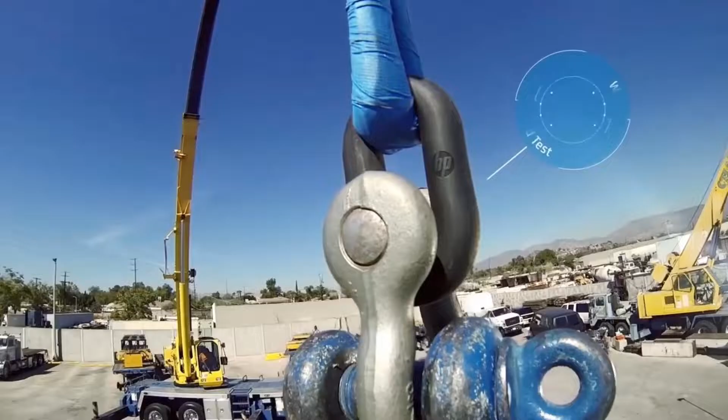To you, designers and engineers, captains of industry, and leaders of thought, anyone whose ambitions have ever exceeded what was possible - this is your moment, your rewrite history, the world is not flat moment. Every facet of how you design and manufacture is about to be reinvented, and it all starts here with the smallest of building blocks, the mighty HP voxel. You and it are about to change the world by advancing rapid prototyping, accelerating manufacturing, and taking precision and strength to unheard of heights. From today forward, the 3D printer is a factory for thought, where the things we make will make us smarter, better, more human. What a future we'll create with new materials and embedded intelligence. Together, we'll bring extraordinary to the everyday and reality to dreams light years away. Welcome to the age of digital production, on demand, a world without waste, without inventory, without warehouses. Meet the first HP Jet Fusion 3D printers, the digital furnaces of the next industrial revolution. Join us as we engineer the never-before voxel by voxel. HP MultiJet Fusion. Keep reinventing.

Thank you. So yeah, I always think it's very useful to start off with that, and then also explain a little bit about where HP are and our journey to 3D printing.

So we officially launched our first printer back in 2016, which was the one you saw in that video at the end. It's quite a large industrial machine, and at the point we released the printer, we'd been watching the market for a very long time, and we'd made the decision that the 3D printing world was brilliant - it's been around for 35 plus years now, but predominantly it's been mostly used for prototyping.

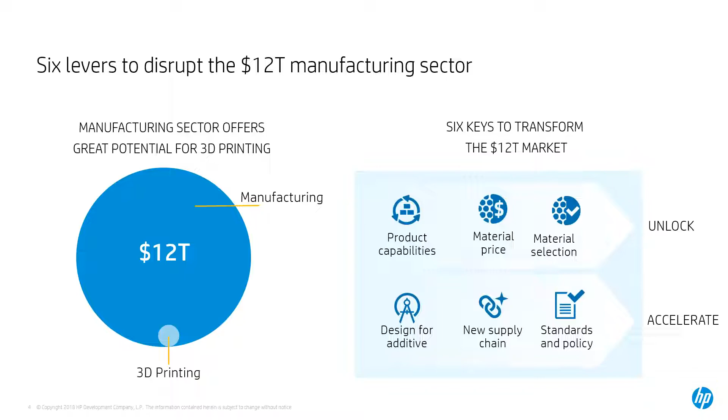So, how do you choose your parts, and why 3D printing? What's the big deal about it now? Oh wait, hang on, sorry—I'm supposed to go MultiJet Fusion Basics first. That was an error. So, MultiJet Fusion Basics.

In this section, you will understand how the technology itself works. Not a deep dive, just a basic overview in 10 minutes. You'll understand the subsystems of the machine and how they interact with each other.

I'll explain this in more detail, but we've got a couple of different machines, and the larger machines aren't just a single standalone printer—they've got other sections with them. Then we'll have a deep dive into the fusing science of the process and how it works, and why we're able to get the superior mechanical properties we talk about, especially in our Z orientation—we get very, very good strength.

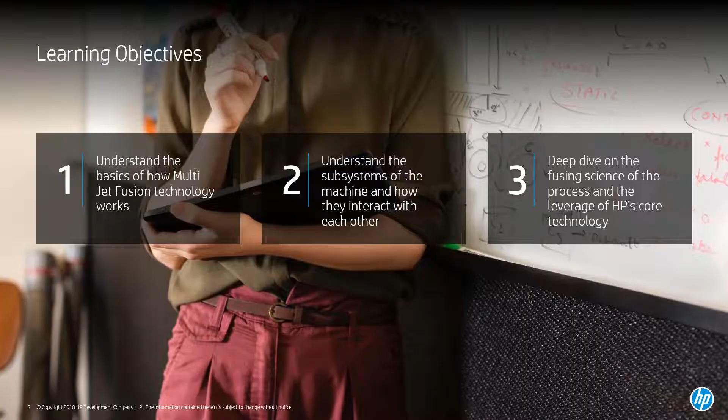The technology itself, the best way of describing it, is something in between material jetting, which uses print heads, and a binder jetting process, which uses print heads and powder. We are a technology in our own right—we are classified as powder bed fusion, that's what we do. And by fusion, we do mean fusion. We're not just sticking the materials together like you do in a binder jetting process—we're actually fusing it. It's actually melting to its melting point and sticking together. I'll go into that afterwards, but just to get rid of any misconceptions, we are a separate technology called powder bed fusion.

So how does it actually work? Well, the process itself is split into 7 stages, very similar probably to other 3D printing technologies you're used to, where you've got a 3D modeling stage, then you prepare your job within a 3D printing software, and you send it to the printer.

With our larger printer, there are 3 stages to the process where we actually do material loading within one of the machines to allow you to have traceability and mix your powders. We then have a separate machine that does the actual printing, and then you go back to that original machine for cooling and mixing the powder again.

Then you have an unpack process and a cleaning process, and then if you wish, a secondary post-processing. Now, with the machine at Sunderland University, they've got the smaller, full color printer that we have, and that is just one single machine that does all of these 3 processes that you can see above.

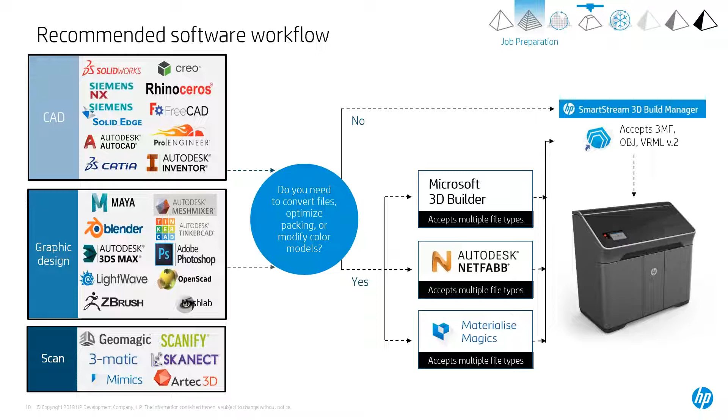So the next slide is a video of the technology and how it works. Like I mentioned, it's a video that's not about the smaller printer, it's about the larger, more manufacturing related printer, but it's just to show you the process and how it works, and why we think it's really able to help you manufacture if you get there at some point.

Introducing the HP Jet Fusion 5200 series, HP's most advanced plastics 3D printing solution. Made up of a printer, build unit, processing station, and HP's first natural cooling unit. Now you can unleash new growth and scale your production with an optimized workflow designed for production environments. The build unit is inserted into the printer to initiate printing.

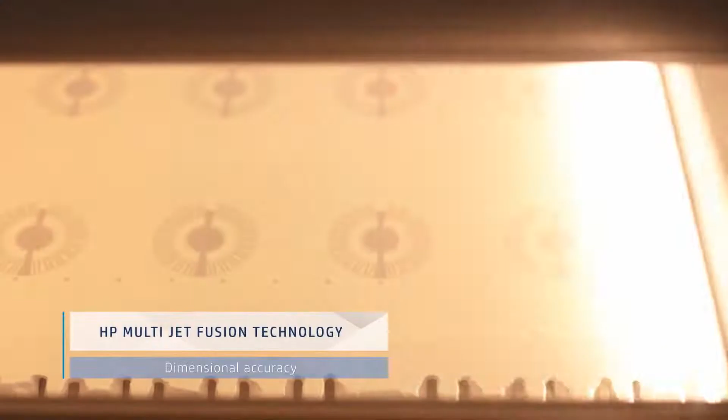HP MultiJet fusion technology delivers dimensional accuracy and repeatability, allowing you to produce functional parts with best-in-class isotropy, while uniquely predictable and consistent print times for any type of part enable you to optimize production.

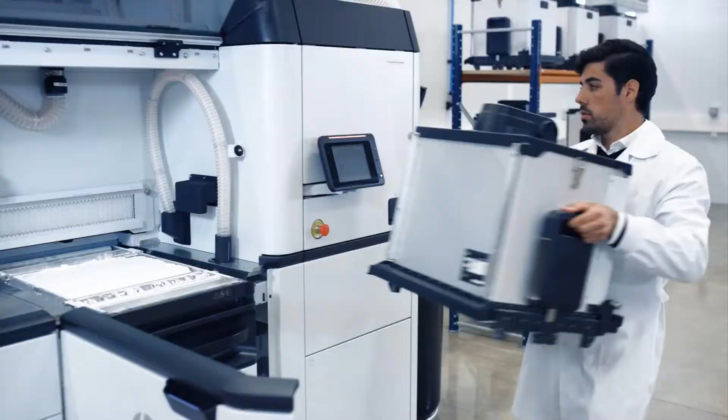When a build is complete, the build unit is inserted into the processing station and prepared for cooling. The HP Jet Fusion 5200 series natural cooling unit is designed to remove and cool each build naturally, thereby enabling continuous production. The natural cooling unit is placed on top of the build unit in the processing station. The sliding lid is removed and the material collector attached to aid extraction.

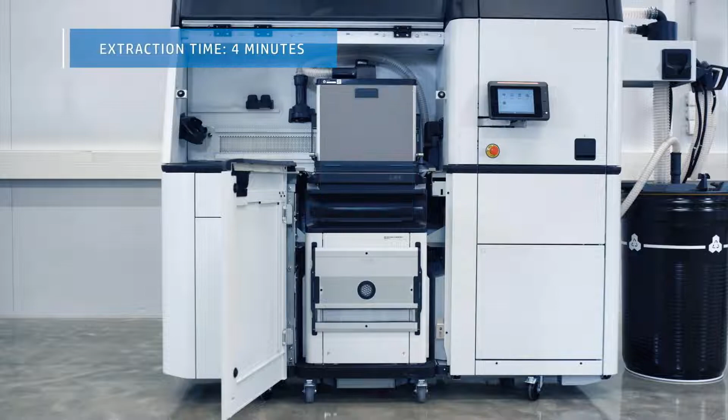The processing station's RFID sensors register the natural cooling unit and the identity of the build, prompting extraction to begin. During extraction, the internal platform of the build unit is raised, moving the build into the natural cooling unit. When the transfer is complete, the slicing blade is reinserted and the material collector detached.

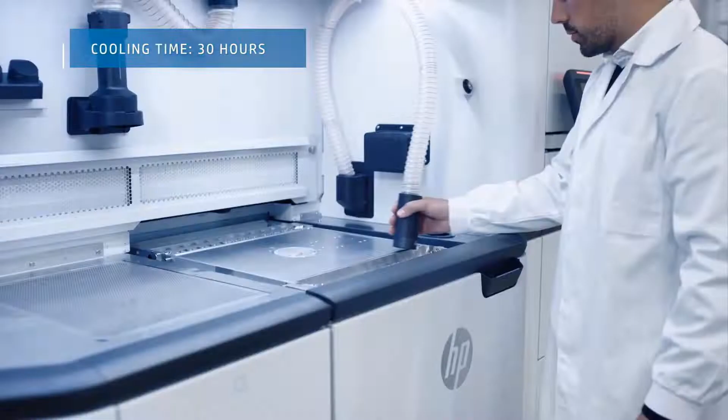The natural cooling unit is then removed from the processing station using the HP recommended Hoffman forklift 5200. It is then stored and left to cool for 30 hours. Meanwhile, the empty build unit can be prepared for the next job, which starts with material loading.

Fresh and reused material is automatically mixed according to the predefined mix ratio and loaded into the build unit in a clean, enclosed process. The build unit is then returned to the printer and production can continue.

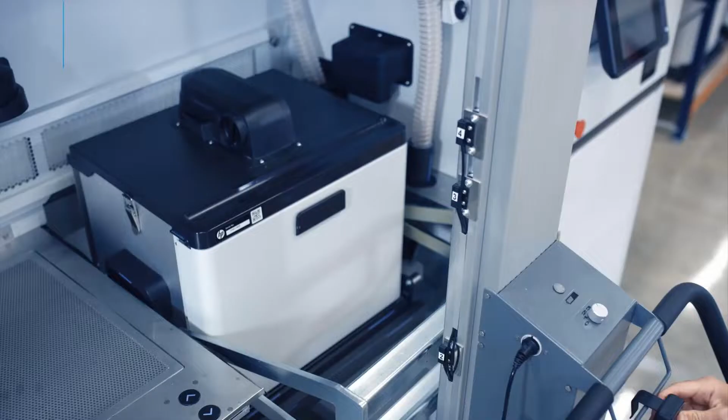When a stored build has cooled completely, it is ready to be unpacked. The natural cooling unit is inserted into the processing station in the unpacking position. The lid is removed and the natural cooling unit cover put in place to ensure the material remains within the processing station for a safe unpacking process.

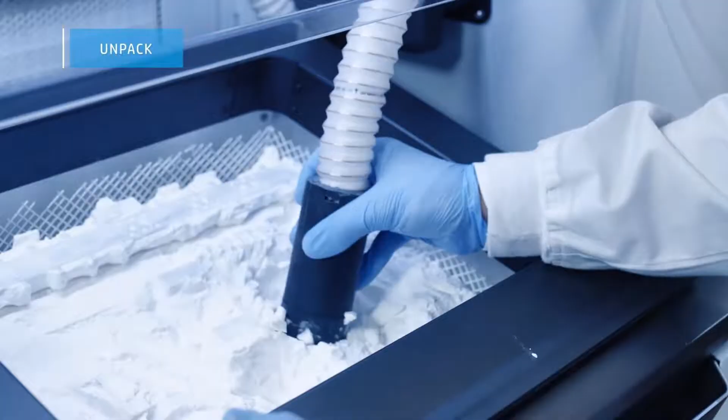During unpacking, the unfused material is extracted for reuse and the parts removed for post-processing. With unpacking complete, the natural cooling unit can be removed from the processing station to await the next build.

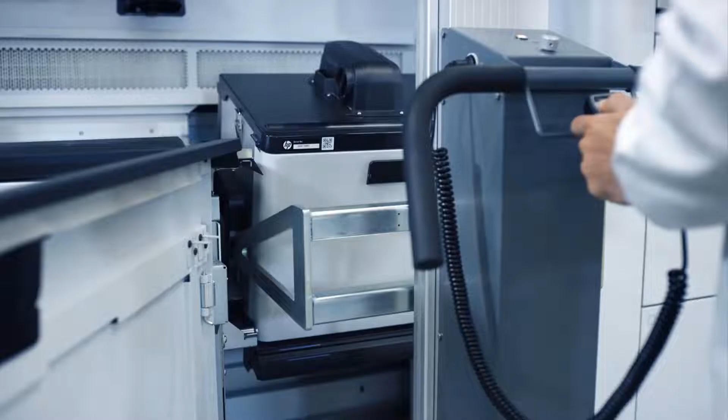The HP Jet Fusion 5200.

So that was a little bit about the technology itself, so you can actually see what it's like and how it works. I'm not going to delve into it too much.

The one thing I will say is, as you saw within the video, there were at least 4 different parts to one printer. With the technology at Sunderland University, everything happens within the one printer - your material mixing, your printing, the cooling of your parts, the recovery of your parts. Even in that machine, the recovery of the parts is actually automatic. The powder is automatically taken out and you're left with a part covered in a small layer of powder that you can then either dust off or take to a bead blast cabinet. So the concept is exactly the same, it's just all done in one machine rather than multiple machines.

The reason we've done it in multiple machines for the bigger one is purely for productivity. If you're really using the technology for manufacturing, you don't want to have to wait for your parts to cool down within the machine before you can recover them, because the cooling time can be quite long, and you want your printer to be able to print 24/7. So we've created it in this way so that you can easily switch out a build and put a new one in, so you can continuously print.

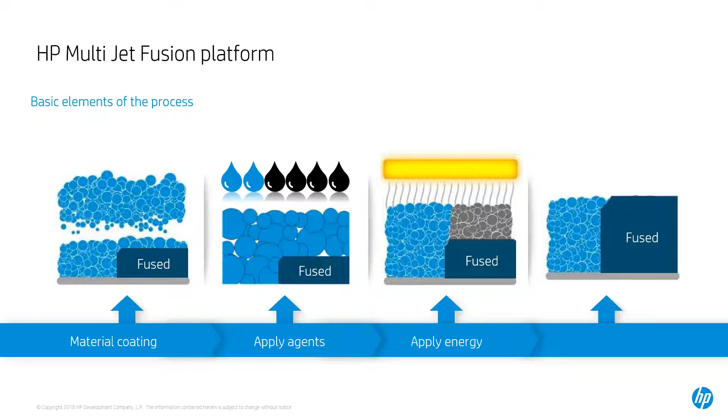In terms of the mechanical properties and what's actually happening, the reason we say we've got isotropic parts is because of the fusion happening in our Z axis. Just like any additive manufacturing process, we are adding layers of powder, but the difference is that as we're adding those layers, we're heating the powder to its melting point. What ends up happening is that between the layers we get molecular diffusion and chain entanglement, which allows the layers to actually fuse between themselves, giving you a much stronger part. Rather than one layer sitting on top of another, those layers are now actually entangled within each other.

The crystalline chains are actually crossing over between those layer boundaries, producing a stronger part, which is near enough equivalent to an injection molded part in terms of strength. So that's kind of the way that it actually works.

And then this is the Jet Fusion 500 series, the 300/500 series. I believe AMAP's got the 500 series, so it's the slightly bigger one, and it allows you to print in...

Do you guys have full color or is it just white? Sorry, Carl, I don't know if you're there. Yeah, I'm here, sorry, trying to turn the microphone back on. Ours is just the white one. Just the white, yeah, so you're able to print in the white color.

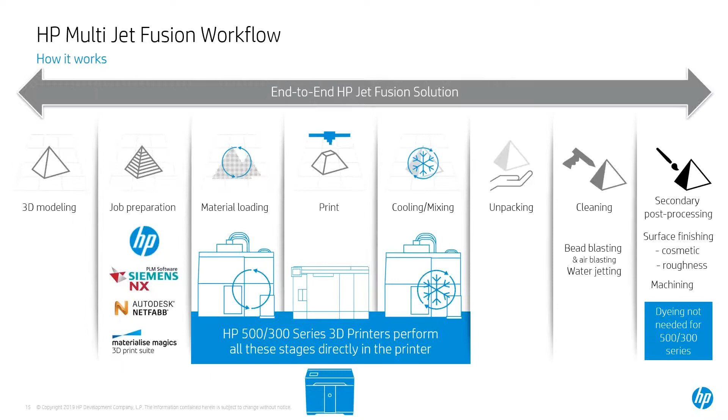So now we will go on to how to choose your part and why 3D. Apologies about the mistake earlier with my slide.

So in this section, hopefully we'll understand the main reasons to adopt 3D printing, and particularly MultiJet Fusion. What are the key value propositions for it? Learn how to identify the best applications for MultiJet Fusion within your business, because not every application is the correct one. Hopefully we can show you where to identify those opportunities and how to identify them, and then understand the why-3D-printing behind some real applications. So I'll divulge into those key value propositions and show you some examples from each of them.

So why are we here today? What we're finding is that market and consumer trends are showing that companies are looking for faster development cycles. They want quicker time to market, and a lot of companies are now moving towards mass customization. We've got companies like Coca-Cola who are putting people's names on bottles, Nutella who are putting people's names on jars. What's the reason for it? It's because people like to see things that are slightly bespoke or slightly customized. So that's kind of the reason why a lot of companies are now moving towards mass customization.

You've got high level management in companies that are now starting to look for double-digit operational improvements. Most options that they look at might only have a small amount of savings, let's say 5% savings or something, and these don't look as attractive as what you're seeing with 3D now. In a lot of cases, you can see significant weight reduction if you're going from CNC parts to plastic parts, up to 80% in cases or more. You can have savings in costs as well, and again, I'll show you some examples of these. So it's starting to look like a real positive contender when it comes to looking for large operational changes.

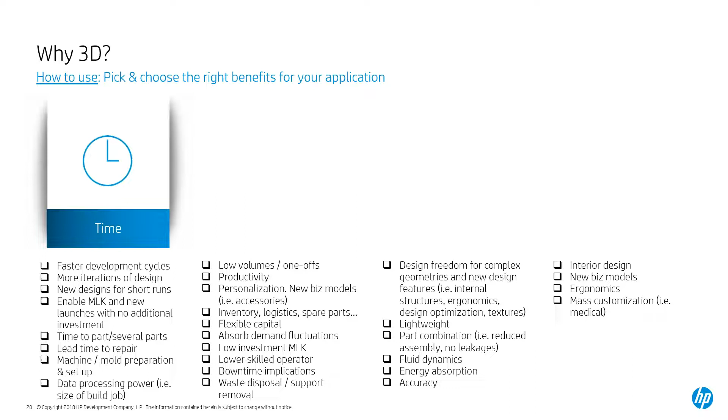For example, if it was a time advantage and you knew that a particular part was going to have a time advantage, but also have an economic advantage, a performance increase, and personalization, that would be a brilliant case for you to go to 3D printing. If moving to 3D printing is only going to improve it in one way, then it might not have such a strong business case. But like I said, if it's a time advantage and it's going to let you go to market faster, then yes, it might be worth you doing it.

Or if it's personalization, for example, which we're finding in the medical industry at the moment, that can have a huge advantage just on its own, whether it costs more to produce or not. Majority of the time it doesn't, but whether it costs more or not, having something that fits better, especially in the prosthetics and orthotics industry, is a huge advantage. So this slide, which I think you've got in the handouts as well, will just help you identify which applications to focus on.

So what I wanted to do now was show you an example from each of these different value props, so you can see where people have used 3D printing and the reason for why they've used it. So the very first one is time, and the example that I'm using here is actually an HP example, an internal example. It's from when we were in the process of producing the 300 500 series printer - this is the one that's at the university. When we were producing this printer, we had announced it, I think, a good year before it was actually available in the market. And because we'd created the first prototype of it, we knew where we were going with it.

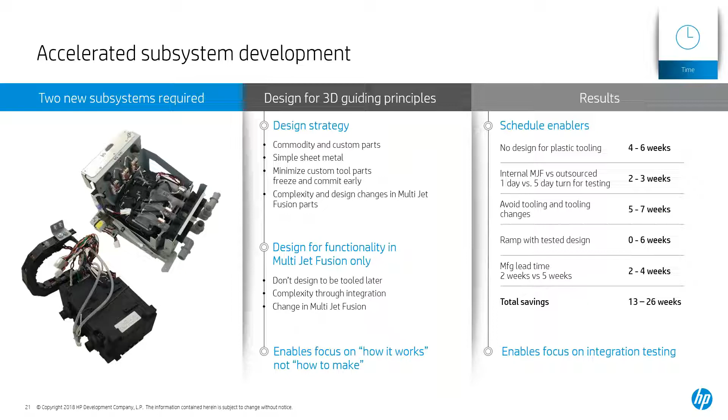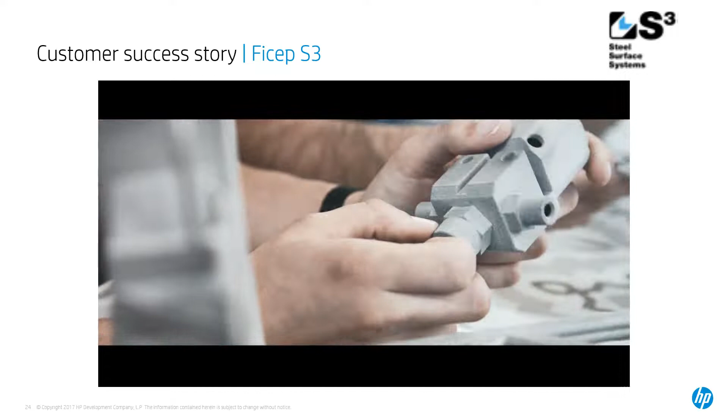Ficep S3 belongs to Ficep Group, a multinational company that constructs machinery for structural steel. When you see a building or a bridge, the metal structure was probably made with one of our machines in over 30 countries worldwide. We never considered using 3D printing for production until we saw HP's MultiJet Fusion in action. Now we're making parts we weren't able to make before, in-house, and we have them the next day. The machine we're building is a paint machine for industrial steel. Once we saw how the parts come out, we noticed how strong and light they were, so we redesigned the entire machine based on this technology. 40% of the machine is done in 3D now.

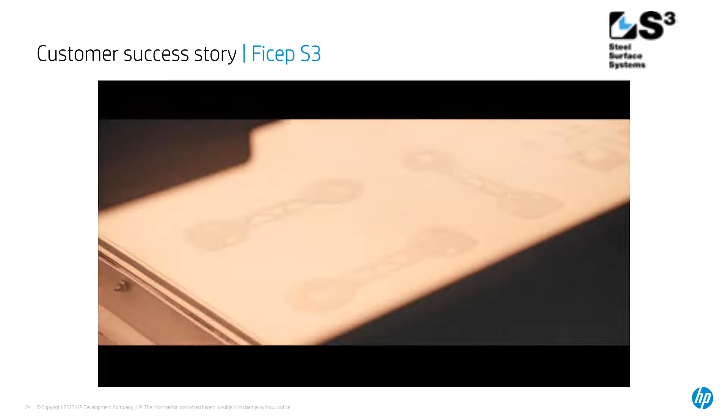The robotic arm, which holds the paint nozzles, is about 1.5 meters high in a traditional machine. We were able to reduce it in 3D to 300 millimeters. You can't design it any better than what it is now. Making the part so small, we were able to save a lot of space, where we could add other systems without increasing the floor space the machine takes up. Just making one part in 3D can help you rethink the entire machine. What HP has done is made us a machine that can not only do the prototypes for us but also the final production. This is where it excels, because now we don't have to wait 12 hours to make one part — in 12 hours, we can make 100 parts.

Going back to that, one of the things he mentioned was performance improvements — making it lighter, smaller, etc. Because they made it lighter, they were also able to add webcams onto the paint arm so they could see how the paint was being sprayed. They found they had a lot of wastage of paint because of the angles and things. By applying webcams, they were able to improve the way the arm sprayed paint onto the beams, which saved them money and gave additional savings in other places.

The final example for this section is personalization. The industry that's really benefited from this the most, from what we can see, is the orthotics and prosthetics industry, the medical industry — anything to do with people and personalization.

The example I've got here is for a company called Invent Medical, and their story is quite incredible. They were a small business in Czech, and they saw one of our early announcements of our printer, back in 2016. They thought this was a great technology they could really use for personalized prosthetics. So they tried to reach out to us, but it was very difficult to get hold of HP, and they were unable to reach us. They created a website dedicated directly to trying to get our attention, and started sending us blasts on Twitter and social media. Eventually they managed to get our attention — this was prior to us properly launching the printer, so we ended up working with them in the development and early stages of the printer, sampling and things like that.

So just looking at that graph again, in the X axis you've got the time along the product's life cycle, so obviously from its development all the way to its aftermarket service stage, and then in the Y axis you've got the production volume. And the graph for 3D tends to look like the total inverse.

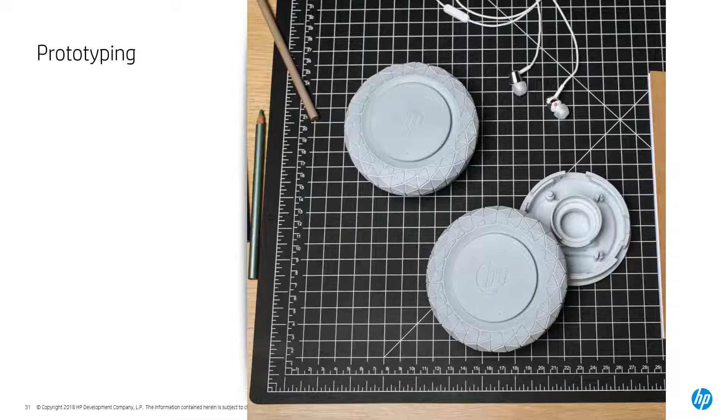So what we found within HP was that the very first area that you can look to adopt the technology, if you're not already doing so, is prototyping. Now for us, we had already adopted 3D printing within prototyping, and prior to the release of our own technologies, we were using competitor technologies to produce 3D printed prototypes.

So for us, this was not an area where we're going to show our adoption journey - we were already doing this. In fact, some of the earlier HP printers, the very first few, did have parts that were made by other manufacturers within them, because we didn't have our own technology at that point to produce parts with.

And now we use our technology because, well, not for everything, but the things that we think it's useful for, we'll use it for that. And it's not one size fits all. You can't use 3D printing everywhere.

There's specific areas where you can use it, and specific areas where you can use HP's technology. So prototyping is one area we were already using it, but a place that we weren't really using it was for molding. So still during the prototyping stages, yes, you can produce your actual prototypes with 3D printing, but you can also use 3D printing technology to produce molds and aids that can help you with the initial production run. So we weren't using it for things like reaction injection molding or blow molding, and this was a place where we realized we can start to implement the technology.

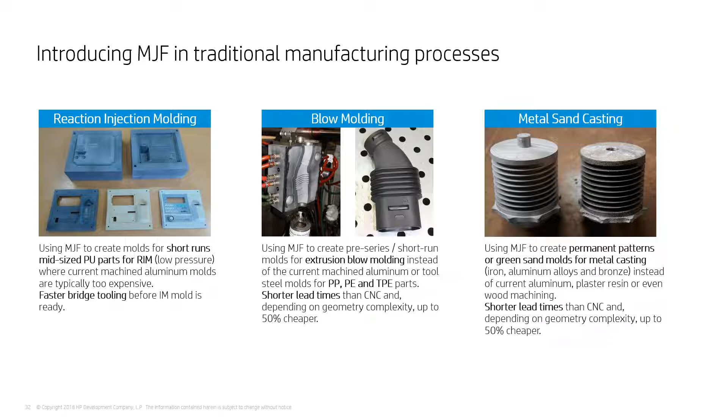When it comes to short runs, 3D printing is great to produce the actual mold itself. So this is just some of the areas, and metal sand casting as well for the green part, silicon molds, thermoforming molds, and then also machining MJF parts. So these are other areas where if you can't produce the actual component or prototype with 3D printing technology, you can still use it elsewhere, or you can use it in what we like to call hybrid production.

Often you'll find that 3D printing, in terms of dimensional accuracy, isn't as accurate as, for example, machining. So what you can do is hybrid production, where you produce your component in 3D printed plastic, and then machine away the specific areas where you need specific dimensions. So you're using the advantages of both technologies. There are other areas we realized we could implement the technology within prototyping.

And then if you go back to that product lifecycle graph, we also started to look at the other end of the curve. So these are kind of the two easiest places to adopt 3D printing: prototyping, and then your spare parts and digital inventory.

We find that in most industries, when it comes to spare parts and procurement, that tends to be quite a big pain point, even with us as well. So one of the examples within HP itself was the example of spare parts.

We found a great opportunity within our large format printing business. These large presses for us can have a lifespan of well over 10 years, often well past the point at which production of those models has ceased. So we still need to be able to service them somehow, so people can continue to use them.

At a certain point within our product life cycle, we do a final buy where we place a final order of the quantity of parts that we think will fill the need for that particular machine for the rest of its life in the install base, however many machines there are. So we place a final order, and I'm pretty sure many of you do this as well.

These are then warehoused and used when needed, and often in order to get a lower price, because the parts are injection molded, you order far more than you need and end up with 50% that usually end up not even being used. So for us, we thought this is a great opportunity for 3D printing and maintaining a digital inventory of spare parts.

So let's just print them when needed rather than having a warehouse full of them. And also those warehousing costs as well, having space, inventory, a warehouse. If you start to look at removing or reducing that, you can find significant savings.

So what we thought was, this is going to be really easy for us, we'll just replace it. But it wasn't possible, because we had our own internal processes that we had to try and get through. What we found was that we weren't allowed to just start printing the parts at the end of the product's life. That process had to be validated at the start of that printer's development. So they wouldn't let us do it.

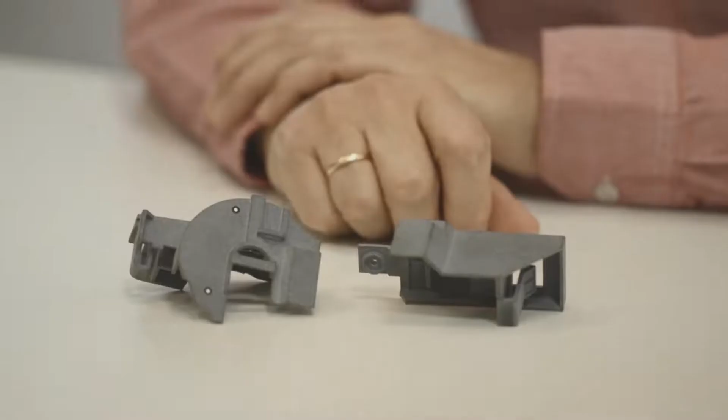There has been a lot of talk into using 3D printing for spare parts. We have several thousand parts that are very low volume, and manufacturing them is always a problem. Finding technologies that allow us to do smaller batches of parts more adjusted to our real needs was an improvement in our supply chain. I had these parts and other parts we were planning on my desk.

Many R&D engineers were going through, all of them were stopping by, and they were excited — oh, this could be done. These are small covers from an existing printer that has been manufactured for more than 10 years, which means it's difficult to get them from the original technology, from injection molding. What we learned is that it could be easily used for many other parts.

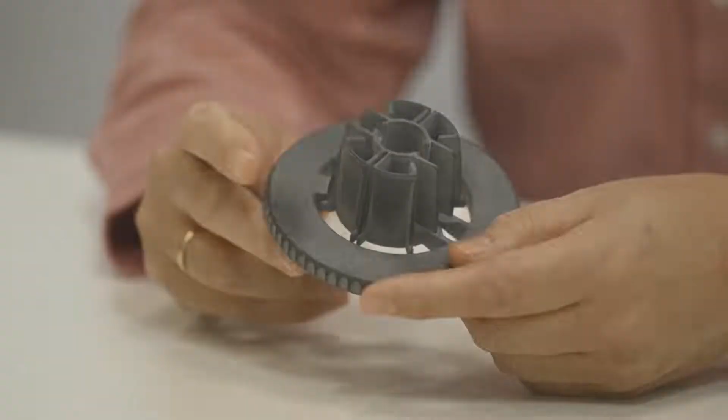We are now going to bigger challenges for the next generation. So you can see some of the parts in that video.

One of the examples we've got — like I mentioned, there was a site, we don't manufacture our own parts, we use third parties. One of our sites, I think in Malaysia, actually bought a machine because they found so much advantage from 3D printing. I think in their first year they had about 80k worth of savings just from replacing injection molded or machined jigs and fixtures with 3D printed ones.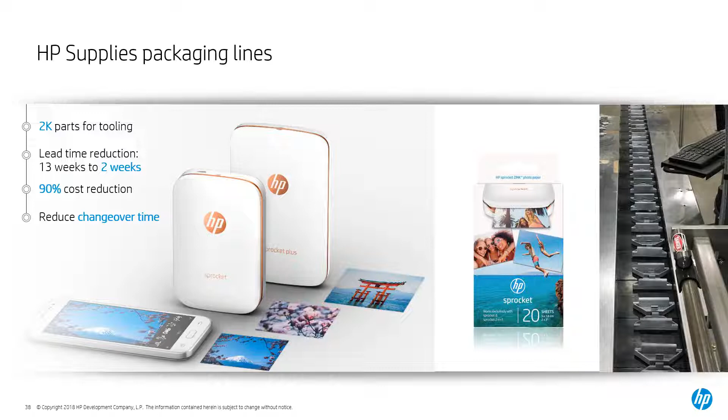The other example is that drill extraction shoe I mentioned earlier, which went from being so many parts to a single part. It's got ease of cleaning and significant weight reduction, because these drill extraction shoes aren't in the easiest locations to access, so for engineers to get to those areas and clean them out or change them, having a heavy one before was not great.

So it's had great advantages for us, and this is actually a totally different location to the one on the previous slide. So we're adopting it across lots of different manufacturing sites at HP.

We then found a great opportunity for 3D printing as a tool for bridge production, getting to market quicker and learning and testing on demand. You can use the mold examples I mentioned earlier when introducing new products. If you don't know how the market's going to receive or adopt them, and you want to produce a small number, you can use the mold examples, or produce certain parts in 3D printing, especially until you know how high the demand is going to be.

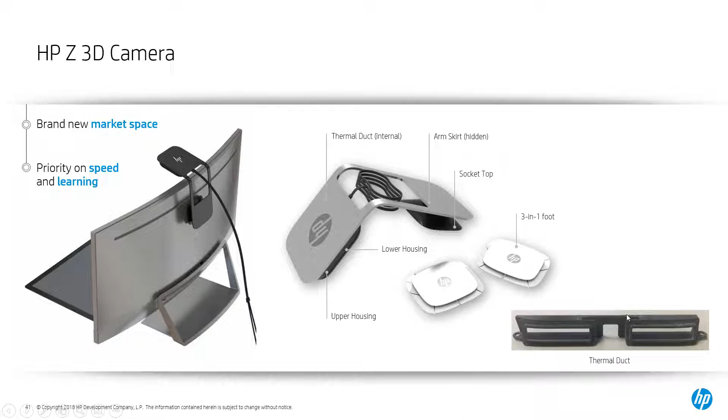Since the product category was new, the priority was on learning and speed. It also meant we had very little way to estimate demand, so production volumes were uncertain. The part in the bottom right, which I'm about to show you, is still in production today being 3D printed - this thermal duct over here is still in production with 3D printing today.

This 3-in-1 foot was initially done with 3D printing, but because there were 3 parts to it, eventually it made more sense to move this one over to injection molding. But the design had to change because the current 3D printed design couldn't be injection molded. So we had a few design improvements, but once we knew how the market was receiving it, we were able to figure out economically what made more sense.

Because there was only a single one of this duct for each 3D camera or scanner, it made sense to just carry on being 3D printed. For us, it gave an idea of how the market was going to receive it, and reduced our lead time. Instead of having to get a tool created to injection mold this, and waiting a couple of months for that tool, we could just 3D print them, have them within a couple of days, and send them out to the market. So for us, this was great.

This cost advantage with the thermal duct - if we injection molded it, it would have cost about 50k more than it did as a 3D printed final part. So it had a good cost saving for us as well.

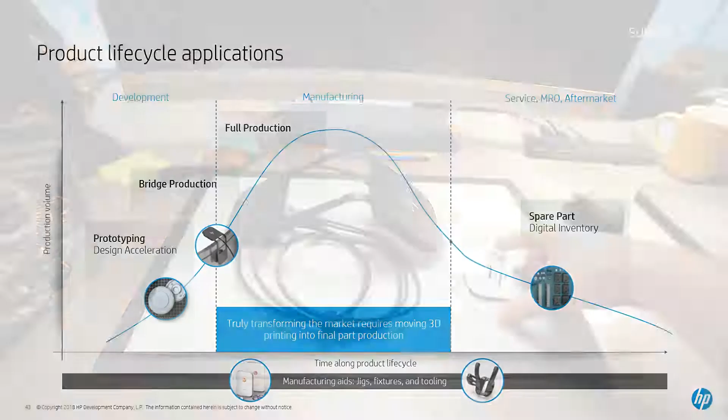Those areas were quite easy areas to adopt 3D printing, and the majority of companies, if not already, probably are doing this. It's the easy place for you to start looking at 3D printing. But for us, that's a very small amount of where the full production happens, and the volume of parts produced in those stages is very little. So in terms of what we wanted to do to hit that manufacturing industry, we're not actually hitting that. We needed to find places where we could introduce 3D printing into full production.

We found an example, though it was a bit of a cheat example because it was a manufactured part, but only a quantity of one, which was this printer we needed for the International Space Station. We were approached by NASA to produce a printer, because printers work with gravity, your paper drops into your tray. So what they needed was a printer able to catch that paper, so it doesn't just float away. They approached us and said, look, we need a printer that's going to work in space. This is just a standard 2D desktop printer, and what we did was develop this feeder and catcher — you'll see it in the next slide.

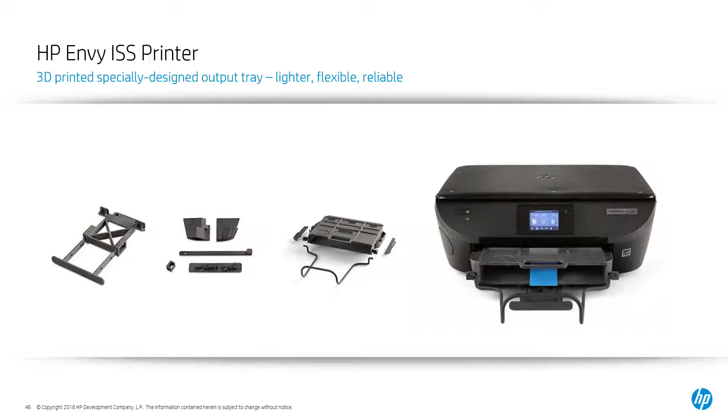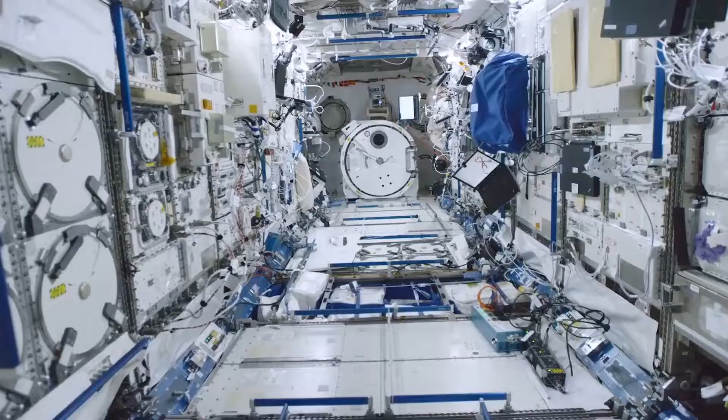Our mission in HP is to engineer experiences that amaze. And there is not a better example of that than the work we have done with NASA. In space, there is no gravity, and our printers work today because of gravity. The only way we were able to address this problem on time was because we had access to HP 3D printing technology. We were able to design more complex parts, but that are also much simpler and more flexible. At some point, we also had to test the whole printer in a zero gravity environment. This shows both how capable our teams are, but really that anything is possible when we work all together.

So that's a nice little case study, but obviously not a truly proper production part. I'd say our first real case study of where we actually used 3D printing in manufacturing is this next part, or this next printer.

This is our latex printing business, and there are several machined components within the machine, one of them is aluminium. Our engineers actually brought it to us and said, do you think you can do anything with this in 3D printing? It was quite a large, heavy aluminium machined block — 355 grams in total. We produced loads of these machines, and it wasn't very complex, as you can see.

The first thing we did was change it into a 3D print block design, as you can see here — we just cut off the big chunk of pointless material that was over here. In machining, the more moves a machine makes and the more complex a part is, the more expensive it becomes, so they'd probably left that bit there because of the cost it would have added. But in terms of weight savings, just changing it to plastic and cutting off that chunk reduced it to 80 grams, significantly reducing the weight.

What we then did was, because with 3D printing you can have a bit of complexity to your design, you don't have to have things that are block and squares and solid. We put a lattice through it. We were walking around, and this reduced the weight to 55 grams. We were walking around with this design for a good year, showing everybody how amazing it was, going from this block to this block over here.

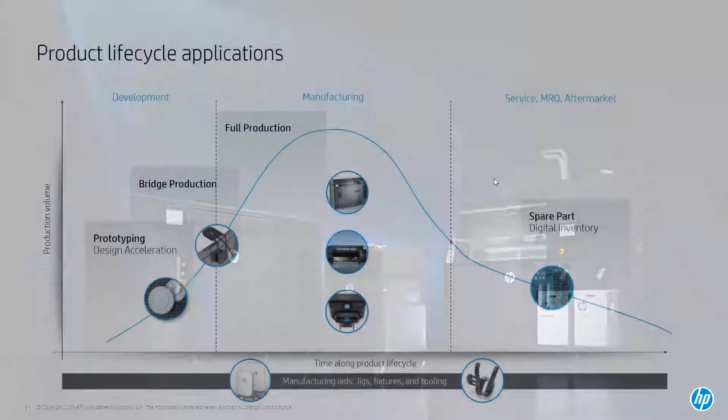So having to look to replace injection molded parts with 3D printed parts made sense. So for the larger printer, this one over here, half of the plastic parts within the printer were printed by the technology itself. Many parts within this machine - and again, we're not producing them ourselves, it is our suppliers that are producing them. I think the break-even points for these parts, just by redesign or thinking about combining different parts into one, climbed from sort of 5,000 parts up to 40,000 parts, just as we started understanding how to design for additive. So that was like another great case study for us.

But the next one is where we really made a real difference. And the only way we were actually able to make this real difference was by getting our engineers to go on training courses, understand how to design for additive manufacturing, how to understand where to apply lattices, how to produce lattices, how to use topology optimization, how to use generative design. We had to show them the real capabilities of 3D printing and what softwares can do now, to get them to properly adopt the technology for the production of the 500, 300 series printers.

So in these printers, initially it's a small printer, quantities in the tens of thousands. When we first started designing it, our designers were quite skeptical about 3D printing, being very used to it as a prototyping or toy technology. They weren't sure if 3D printing could meet the needs of the parts or be robust enough. So they came back to us with 29 parts they thought could be 3D printed. That wasn't a good enough story for us, and we thought we could definitely do better.

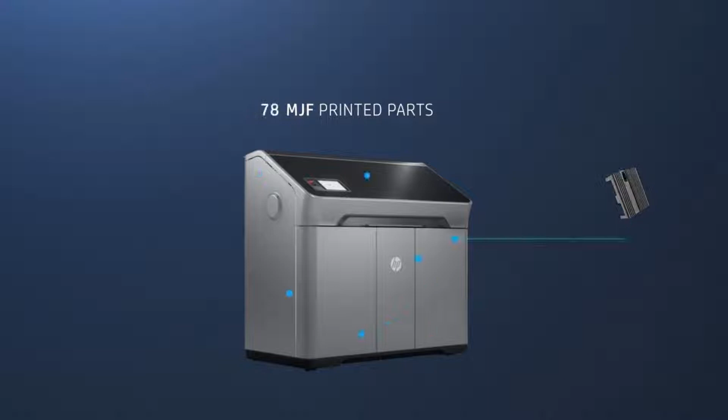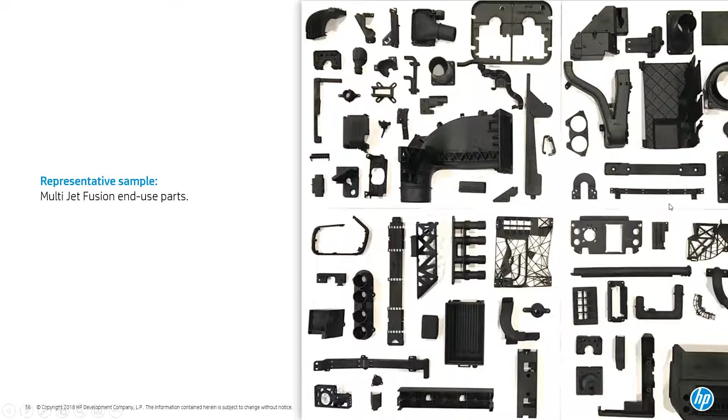Looking at some of those parts—we'll go more into this in the final stage of my presentation—these are the sorts of designs. As you can see, a lot of them, especially these ones, are not your standard designs you'd normally see, especially if designing for injection molding or machining. Some are quite complex looking, many have more than one function, and many are multiple parts that would usually be injection molded in 3, 4, or 5 pieces but are now 3D printed as a single part. So this is just some of the 140 parts—we'll go into the funnier looking ones afterwards.

One example is this 3D printed duct. Our parts are fluid tight and airtight, and this duct was never designed to be injection molded. If it had been, it would have involved about 6 different parts as well as a threaded insert, and would have been quite costly to produce. It was always designed for 3D printing from the get-go. As you can see on the right-hand side, it's one single duct with another attachment at the bottom. That key area is one single duct with a fan inside of it.

For us to produce it with 3D printing, it had a capital expense avoidance—we avoided a tooling cost of 190K. When it came to production costs in total, that amounts to a total cost saving of 30% compared to if it had been injection molded. So for us this was quite a good example, and there were also time savings for the designer as well.

Now, we have a partnership with Siemens, and Siemens were looking for components that they could really show their value on. We were in a meeting with them, and while they were there, they saw this duct and said, you know what, we think we can design this better than you guys have done using our software—we're going to show you what our software can truly do.

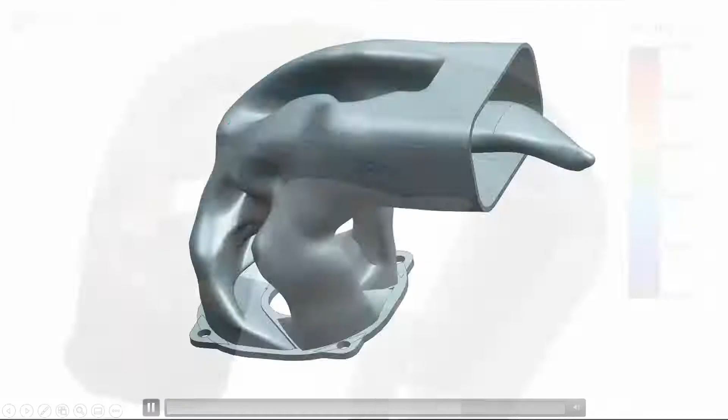As it does that, you can see—there's a lot of turbulence at the start over here. The flow seems okay towards the end, but there's a lot of turbulence on the corners and edges. And so Siemens said, we feel we can improve this part for you. And they did.

They changed the design from being this single 3D printed part to this single 3D printed part, which, as you can see, looks quite organic and different to what you're used to seeing. Over here, you can't see it properly, but there is basically a tongue in the design. Again, a tongue is very organic, but in terms of its design, it helps improve the flow of the heat that's extracted from the print head.

I'm not going to go into it too much because the video itself explains it, and it explains the full Siemens process and what the software is capable of doing, all the way to producing a digital twin and your smart factory environment. But they go through the story a lot better.

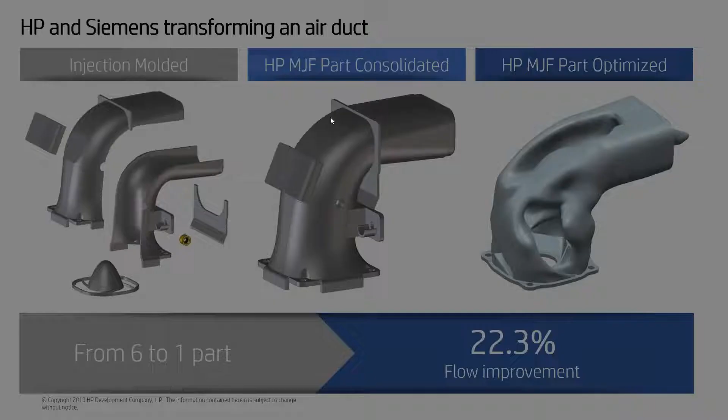Additive manufacturing works always from the application backwards, user-centric. If we're not helping customers visualize the potential of this new technology, it won't happen naturally.

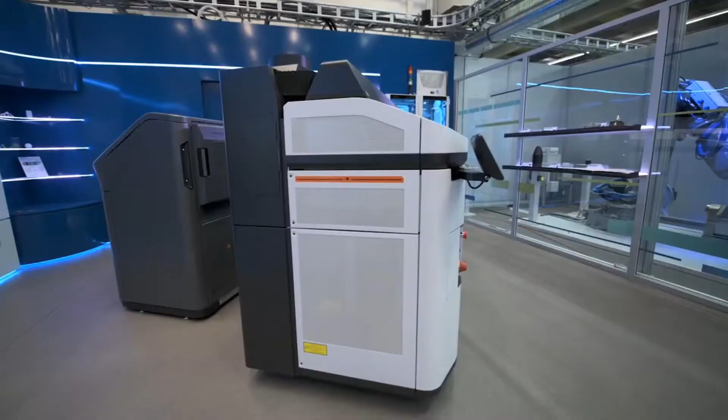We came together with the new development from HP for the much more productive 5200 series system, and the Siemens software solution. A deadline is the mother of innovation. This started a few months before we launched the 5200, and that gave us a couple of months to come up with something. So we got our teams together for a workshop in Vancouver, Washington, and we spent 3 days together, locked in a room.

We talked about structures in an automobile that you could optimize for crash protection. We talked about cooling in batteries. All that while we were brainstorming, there was this unassuming cooling duct sitting in the middle of the table. Finally, one of our guys picked it up and said, 'What is this?' Of all the possibilities, we landed on a duct, which is part of our own HP 3D printing devices.

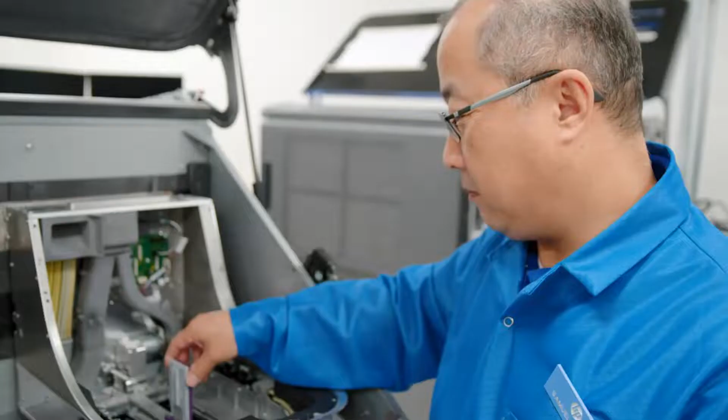To maintain the reliability for that print head, we need to keep the ink cool, and that's done through the cooling system. The duct was an integral part of connecting the fans to the cooling of the pen. We already had a 3D printed version which combined 6 parts into one, but we wanted more. We wanted more performance from the general flow, and we wanted more balance between the two print heads.

Our optimization will look at which parts of that design space help to gain our engineering objective, which is minimizing pressure loss, and basically then remove those parts which are detractors.

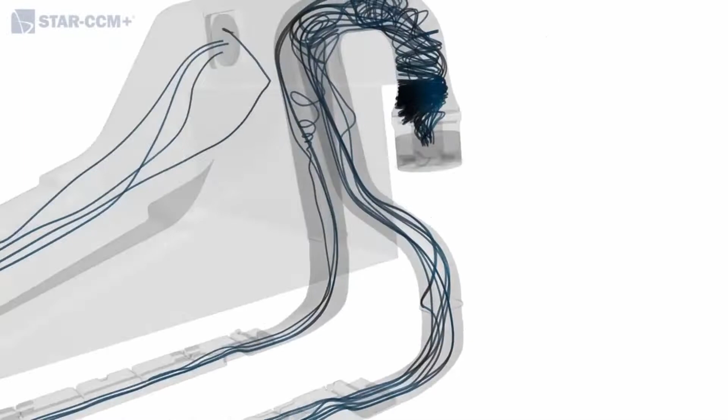We had a super large amount of recirculation, so basically the air is going in circles, losing a lot of energy. Now we have basically 4 distinct flow guiding vanes which take out the swirl and immediately force the flow to go straight forward instead of going in circles.

So it was really hard to wrap your head around that geometry when we first got it from Julian, just because it was so different than what everybody was expecting. So I had to take that geometry, smooth it out, create a thin-walled part from that we could use to create the duct part.

When you talk about how the original duct was designed, where a person had to manually make every radii, every extrude, every little feature on that part, with a simulation-driven part, you don't have that. The simulation makes the geometry for you, and that is a much faster process than trying to design all that by hand.

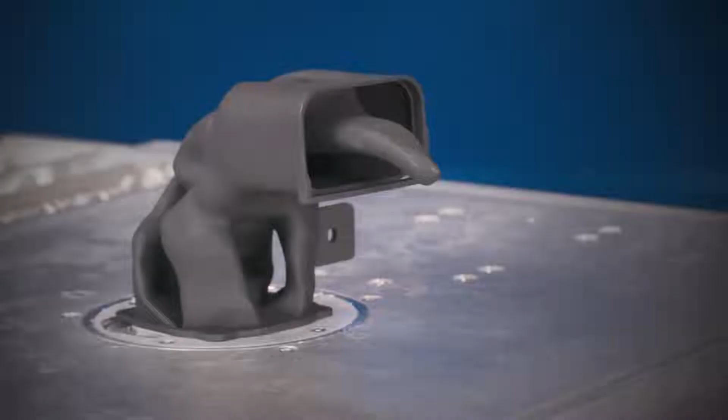As the design was shaping up, it defied whatever everyone, including me, was expecting it should look like, with the tongue sticking out. I was pretty stunned when I learned that the software predicted a 22% improvement in airflow. 22%? That seems pretty high compared to our baseline. But again, Siemens, they are the simulation experts.

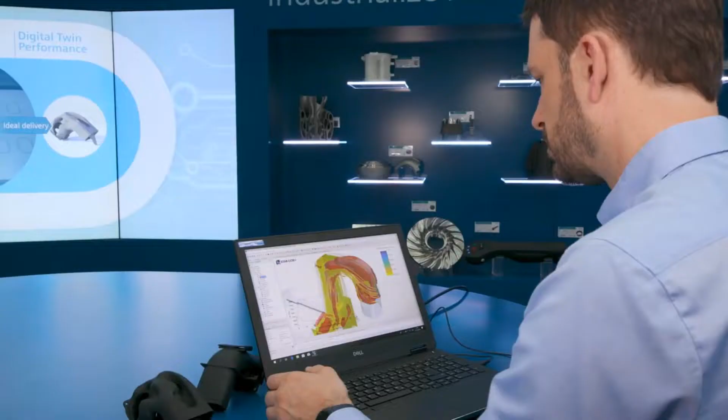We had to go back to the physical world and actually test that new design is going to deliver more airflow. Sure enough, when we went back and measured, the Siemens design duct improved the airflow by 22%, just as the software predicted. On the other side, normally you need months to develop these, and here we have reduced the innovation cycle time by 75%.

Which is quite remarkable to think about, because it's not like you landed on a design, you landed on the most optimal design for that particular problem.

Getting the optimized design was just half of the battle. The next part of the challenge was transitioning that design into the AM factory where we could produce it at scale. A lot of companies only have experience with lab-like environments. So they have 2 or 3 printers, they know how to operate it, but they actually don't know how it will look like if they ramp it up with more printers.

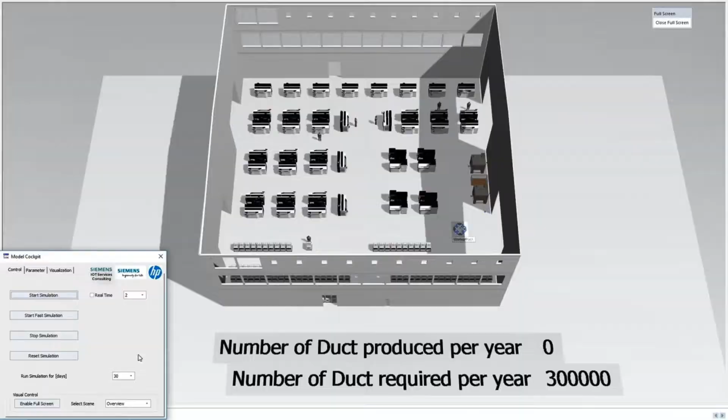We are able to show the full simulation up to 100, 200, 300,000 parts by utilizing a digital twin, and then start with different scenarios to optimize how to improve it. For the end state, with 300,000 parts, we would need 36 printers and 6 workers.

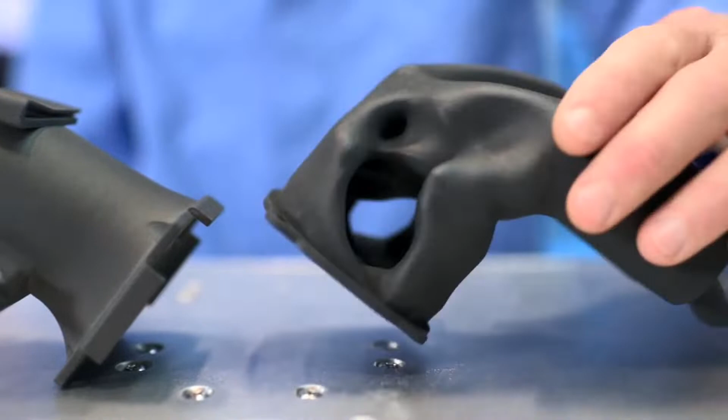We can take an application with improved performance from the flow optimization, show that we can produce it in the industrial printing system, and this is unique in the world. It kind of tips engineering on its head a little bit. Engineers no more should really be focused on the form and what the product looks like. They should be focused on what the product needs to achieve. We've got a part now that has done something that I don't think anybody else in the industry has done. And when you combine that with HP's ability to industrialize additive manufacturing with their printers, it's a really strong solution.

Interest in this type of solution has been outstanding, and not only in the automotive industry, but also consumer goods. Think about refrigerators, air conditionings, vacuum cleaners.

What I'm most fond of from this project is going into meetings and handing the duct to a CXO and having them hold it and be inspired by what was possible with additive manufacturing and generative engineering, and wanting to find a way for their company to be able to repeat this kind of success.

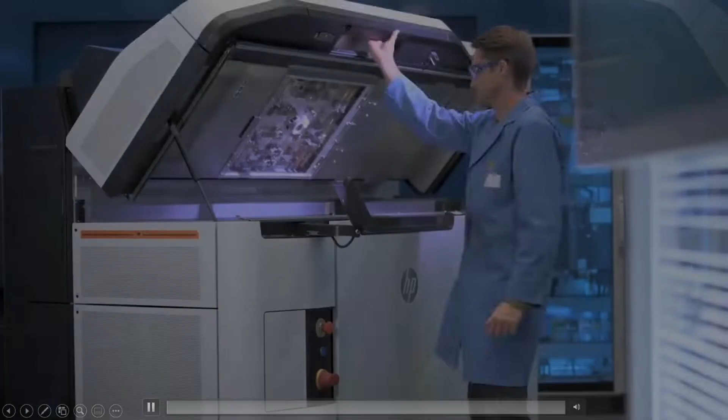So that's a really brilliant example, just to show you what 3D printing really can do, what it can fully achieve if you are utilizing it the way it's supposed to be utilized. So the key takeaways from that was that for us, it increased our print head speed by 14.8%, which meant that our printer could go much faster. And that was all to do with this brand new design, which could only have been produced with software.

As much as designers are able to produce brilliant designs, the time that it takes, it's incredibly time consuming, should I say. And so using software can significantly reduce that development speed, that development cycle, and then produce the most optimum design, the one that will work the best in that situation.

And it's an internal part, so it doesn't need to look amazing. Though to me, it looks very futuristic, and it does look quite cool. But it's not what you would normally class as a good looking part, let's say. So again, in this case, it doesn't matter because it's a part that just needs to function properly.

And like they mentioned, what 3D printing can do is reduce that development cycle. So where you've got your traditional path, you would design your part, you would design it for manufacture, you would process the simulation, you would design the tool, you'd get the tool created, you would build it, test it, and if there was something wrong, you'd have to start again, get that tool redesigned, etc. The process is quite long.

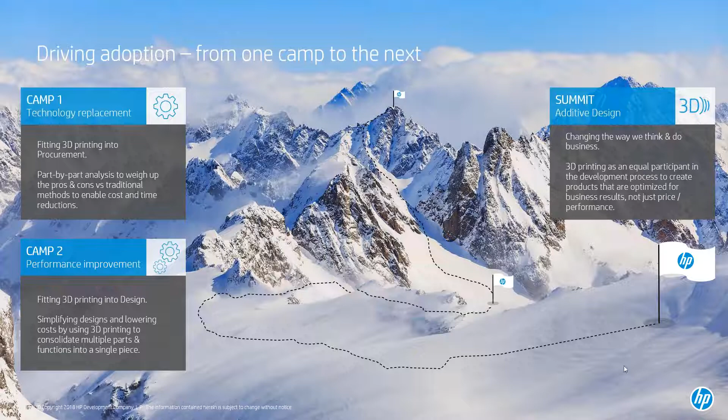The next couple of slides are just a couple of videos of our own HP engineers who designed — I think most of them were part of the team that designed the color printer, or the white or color printer — and their takeaway after utilizing 3D printing, because just like everybody else previously, they hadn't used very much 3D printing before.

One of our major design challenges was designing a part that provided the functionality we wanted, and MultiJet Fusion allowed us to achieve that in a very short amount of time. We cut our tooling lead time from seven weeks to a matter of days, and it came down to the question of what the limits of this technology are and how we can push those. We needed to feel confident that MultiJet Fusion technology would produce the parts we wanted, compared to traditional 3D printing methods. Being able to see, feel, and look at your parts is such an important learning process, and that's what helps us move on to our next iteration and design closer to our solution. That's really what gives the edge and the hype to MultiJet Fusion.

One of the biggest challenges is rethinking the approach to product design. What HP MultiJet Fusion does is basically place the manufacturing tool set in the heart of the R&D development process, merging two critical elements of the development process together. I would say to an engineer who is not using MultiJet Fusion that they are overlooking a critical tool set that enables them to innovate, learn much quicker, and focus their time and energy on delivering a part design that delivers customer appreciated value. It's transformational.

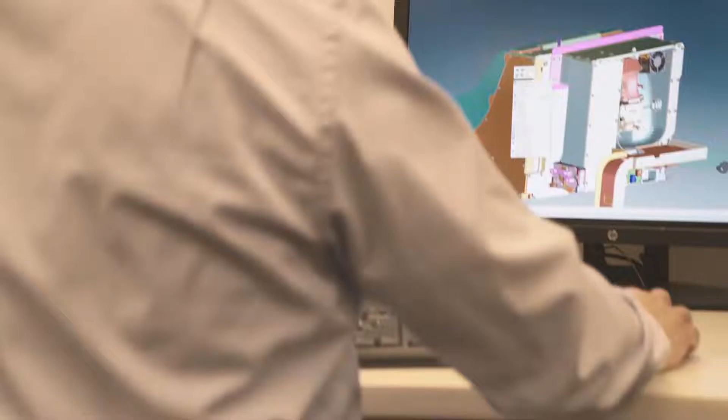In the past, whenever you do your design work, you need to follow certain rules: how it's makeable, how it's moldable, how it's manufacturable. But once I use MultiJet Fusion, all that kind of constraint is going to disappear. Generally, my design cycle is about 50% reduced, because you can just focus your design in the 3D CAD, and then print it out as you see in the CAD. MultiJet Fusion gives us freedom of design and flexibility of design.

The other 3D printing technologies don't have enough resolution to make my parts. The strength and resolution, those two are the most beneficial. When I introduced this example to our team, they were also very excited. I believe that this is just the beginning of a new era of design.

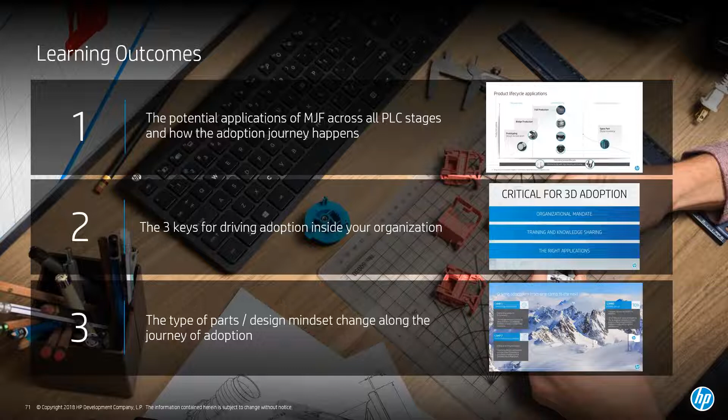So hopefully you got the key learning outcomes that I was hoping for from that section. Hopefully it started to give you some ideas of where to look for opportunities within your own business. The final section I wanted to focus on today is something we like to call new design paradigms, and it starts to look at understanding costings with our technology.

Probably similar technologies when it comes to powder bed fusion, because again with 3D printing, the way you produce your parts is effectively the space that you've got available and how you utilize that space. So hopefully you'll understand how to take advantage of design freedom without design ignorance, explore new design paradigms enabled by additive manufacturing in both existing and new products, and then finally learn how to optimize design for the MultiJet Fusion process.

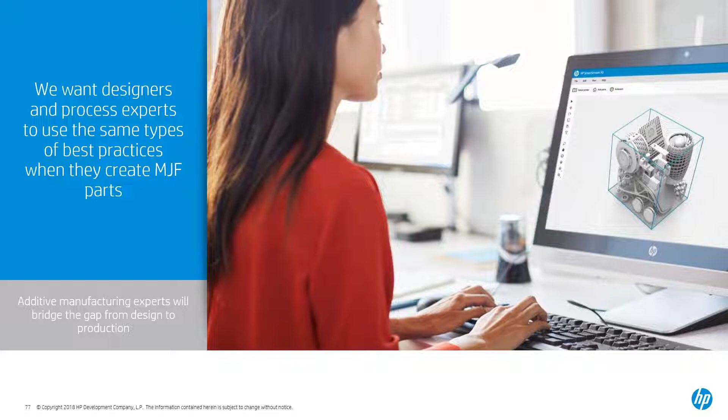And with 3D printing, specifically HP's 3D printing, you've got to think about the same kind of design rules. With injection molding, you're used to designing for shrinkage. With HP's MultiJet Fusion, we're using thermoplastics, which again can shrink, so you've got to start thinking about those kinds of rules, as well as how you're going to place things inside of the build itself.

So the very first thing that we start to get people thinking about differently is: for injection molding, for ease of design, we're used to most boxes being like an orthogonal box kind of shape, a square kind of shape. Now this is brilliant for injection molding because it reduces your part cost and produces what you need to produce.

And if you wanted to produce a box in 3D printing, you'd probably go with your traditional mindset and produce it the same way that you normally would think a box should look like. But for our technology, that's actually a disadvantage, because of the way that the printer works.

In order to design for 3D, it'd be better for you to think about changing the top of that box or the bottom of that box to maybe a dome-like structure, so you can reduce that thermal energy, and again, corrugation would do a similar kind of thing. So you have to start thinking about designing for the process itself.

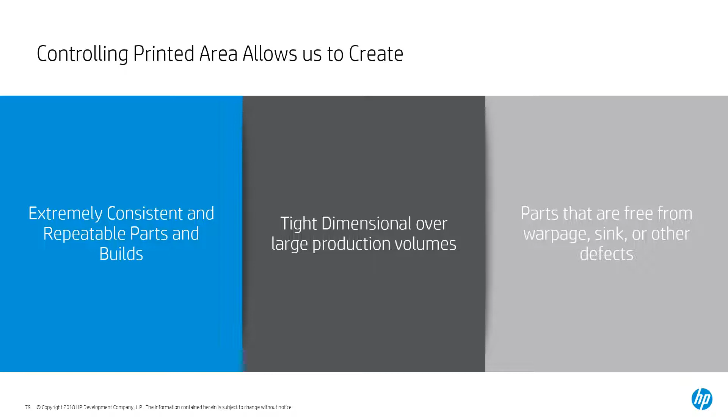There are several points in the development cycle where additive manufacturing can be incorporated into the design. Ideally, it's envisioned from the outset when a product is defined, but we know that's not always the case. Often, as designers, we have to adapt an existing design to benefit from the economic advantages of additive manufacturing. So when this happens, we need to work out whether it makes sense to redesign the part.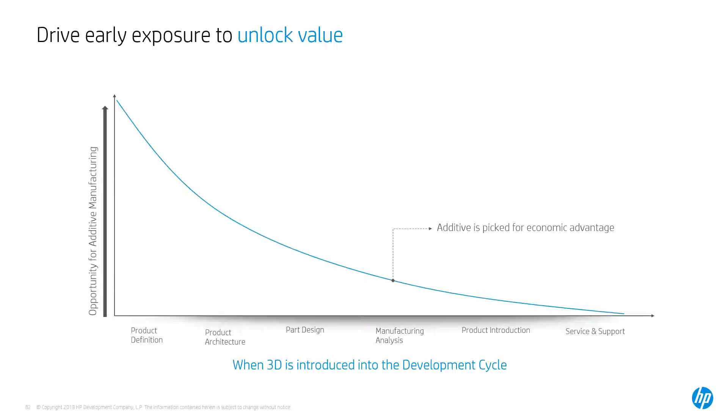There are several points in the development cycle where you can do this, and the very latest point is when additive is picked for an economic advantage. So when redesigning a part, one of the factors you need to consider is the solidness of the part. For very dense parts, the potential reduction in weight and cost is a key advantage brought by the design freedom of 3D printing, so these parts are ideal for applying redesign strategies.

Another factor is part size, so parts with higher production volumes. So what parts should you redesign? Let's look at the part type first. If it's a solid part, for very dense parts, the potential reduction in weight and cost is a key advantage brought to you by the design freedom of 3D printing, so these parts are ideal for applying a redesign strategy.

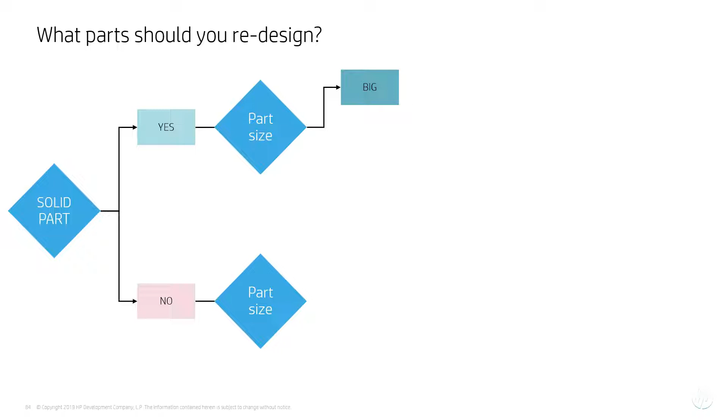What's the next consideration, which will determine whether it makes sense to redesign a solid part? You've got part size. With large parts, if we reduce the weight by a certain percentage, this will result in lower costs and increased performance, and the resulting part will be lighter.

What if it's a big part? Then yes, we should reconsider designing it. However, if the part is small, we need to assess the impact of the change on production volume to justify the time we've spent redesigning the part.

So if the production volume is high, then the impact of redesign to lower part weight, and hence the cost, is significantly higher. If the production volume is low, then we need to analyze the business case.

What is the next consideration if the part isn't solid? It's the part size. For example, is the part big? Then we need to check production volumes, and if the volume is high, redesign - so you go back around the decision tree. If the part is small, then it really doesn't make sense to redesign that part.

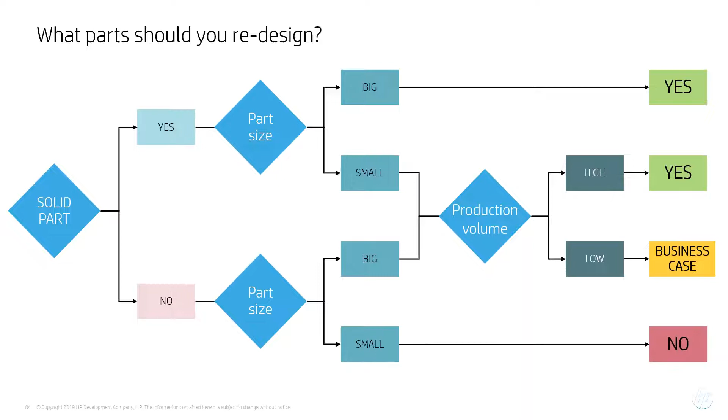If the part has already been designed, then usually the simplest way for you to redesign it is, one, hollow it - remove weight from it. Two, if hollowing it won't allow it to perform its function, then you can use a lattice structure, which will allow it to still have some kind of structure inside of it. Or you can use topology optimization. Those are the key things you can do if the part has already been designed.

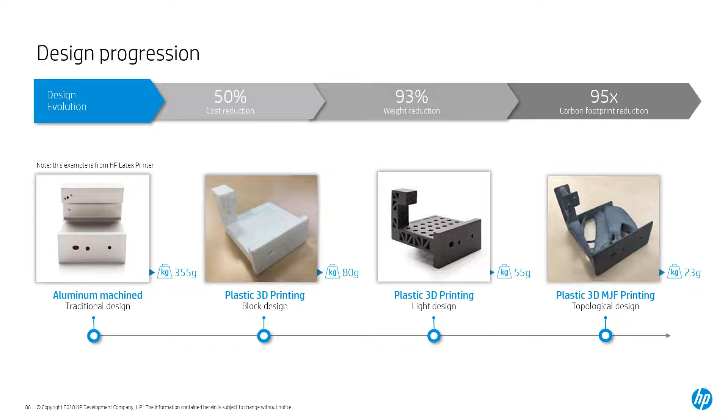So what redesign strategy should you apply, depending on the mechanical requirements, the performance, complexity, the size of the part, the production volume? Let's look back at the decision tree to determine the best redesign strategy.

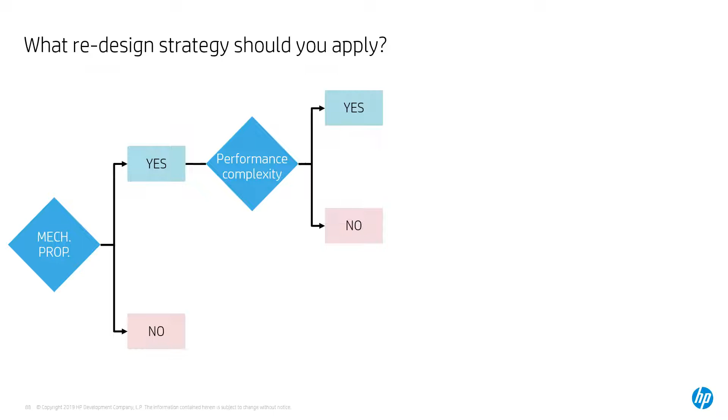Let's start checking the mechanical properties of the part. If the mechanical properties are important, what is the next thing we have to check? If the performance is key for the part, what else has to be taken into account? If the production volume is high, then we can use topology optimization. If the production volume is low, then there is a business case for you to redesign the part.

If performance is not an issue, then take into account whether the part is solid. If it's solid, use a lattice structure. If the part isn't solid, manually modify the design. If the mechanical properties aren't important and the part is solid, then simply hollow the part - that's probably the easiest thing you can do.

And there it is, sorry. And if the part isn't solid, then you need to modify the design manually.

But if additive manufacturing is considered from the start, we can achieve value that can only be achieved with additive design. Let's look at an example of this.

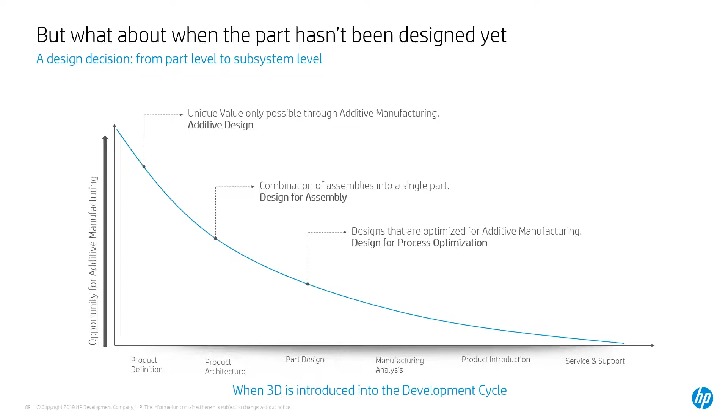For us, one example is going back to those parts in the 500, 300 series - these weird, complex looking parts that we can only design as having a bit like a skeletal kind of structure. The reason we've created these is because they help us control our thermal mass, increase repeatability, and hold those tighter tolerances we're talking about.

If this was injection molded, maybe you would have just a flat surface because that would be easier to mold. But for us to print that big flat surface would mean we're likely to have shrinkage or sinkage. So for that reason, we would design it totally differently, with a totally different idea, creating these kinds of structures and removing material that's not needed. That's why these parts look the way they do.

Looking at that on a more basic part, this is kind of what our parts are going through.

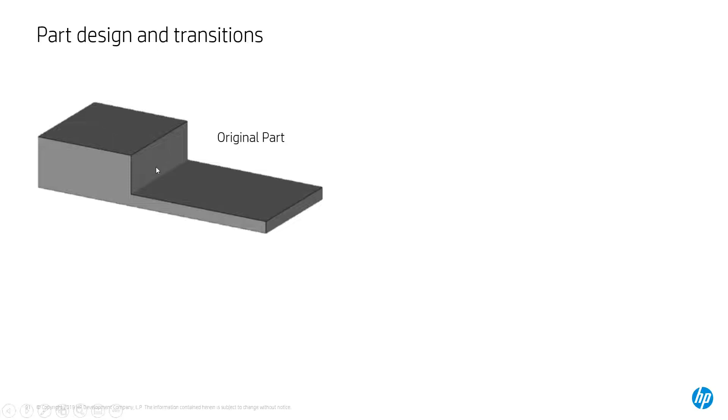Say this was your original part, with this kind of step with a larger step. What could potentially happen within our machine is warpage, because you've got a load of heat in one area and then the area towards the end, which is quite cool, is quite likely to warp slightly. So to avoid that, one approach would be to have a lighter design, to create a lattice structure through it, or to have a smoother transition so it's not such a shock to the part, and hopefully it won't warp or experience that kind of defect.

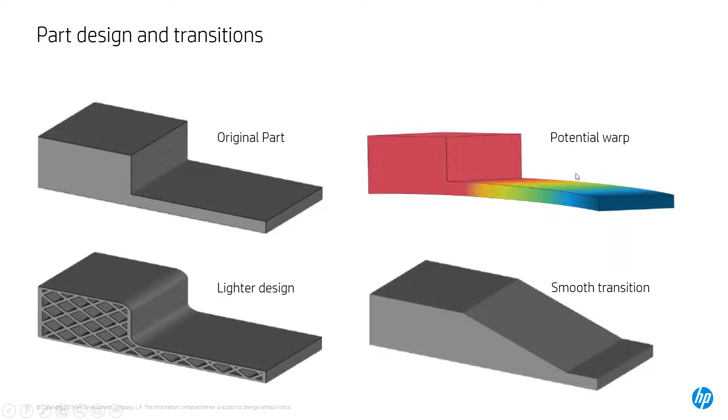This is just an example to show what would be better for us. If we look to incorporate economics into the already optimal design, now you can start to unlock even more value. This is your additive design being mixed with your economic advantage.

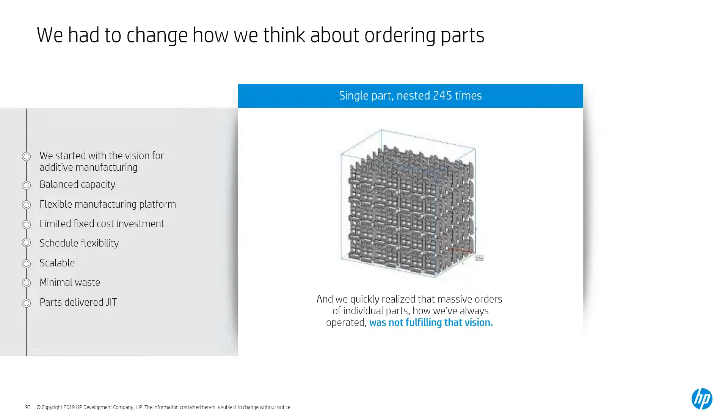When we started all of this, we had a vision of what 3D printing could mean for manufacturing, and we realized we weren't meeting that vision by doing things the way they'd always been done. We had to re-envision what manufacturing meant and how to deliver the maximum amount of value. This meant changing how we assessed parts from an individual part-by-part basis, and changing the way we think about ordering parts as well.

So we took a page from the automotive book and started thinking in terms of sets, leading to a term we borrowed from the automotive industry called Kanban. This is the idea that a set can contain all of the parts that you need for a product. Printing one set gives you the parts for one printer. Printing a full build, which in this case was 3 sets, gave you enough parts to make 3 printers. This method of assessment allows organizations to connect the supply and demand of the system, limiting inventory and improving reaction time.

So we started thinking about design in terms of increasing build density. The example on the left is a strategy also called solo cupping, where you stack cups for efficient use of space within a cupboard. It's the same thing we do within our printers — you can stack parts to use the space that would previously have been wasted.

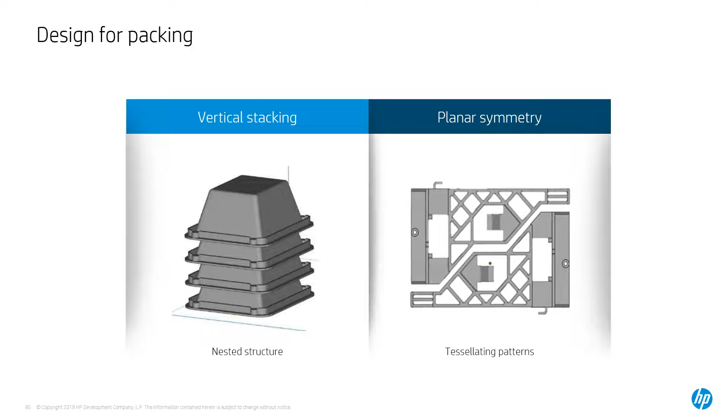Lots of parts have orthogonal walls because orthogonal walls are easy to design, but we found that means you can't stack them. By angling the walls by 15 degrees, now you can stack them, and also significantly reduce the cost of the build — for this example, by 40%. Using planar symmetry as well, you can do the same thing again, allowing those parts to stack within a build more easily.

Another example you can use is hinges, where things may previously not have been folded. You can start to apply hinge strategies to get a better part cost. This example again is from the printer, and there are a few of them as you can see on the right hand side. What we basically did was with O-rings — normally, I'm sure you're used to using O-rings, they're always a solid loop, not able to be opened.

What we found was with the original design, we were only able to fit 108 within the build because there was a whole load of wasted space inside of it. So the designer, the girl in the video, redesigned it to apply some hinges with seals so it can lie flat in the build. That meant the number of parts in the build went from 108 to 198, enabling a 45% decrease in the cost per part — an economics advantage, as well as eventually a design advantage, because this particular O-ring is in a location that's quite difficult to access within the printer.

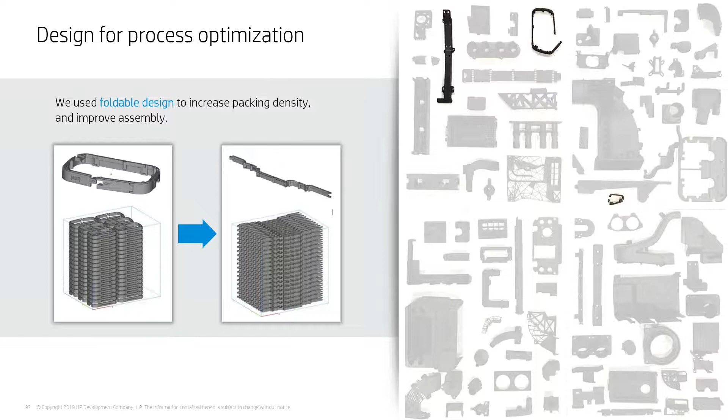Rather than trying to wiggle it up, the engineer can just whip it around the back and clip it in the front, which makes it a lot easier to use. So it ended up having a design advantage as well as a cost advantage.

Same with the parts we designed for that printer. Originally, we could fit 2 sets within our build, and as you can see, a lot of the boxes had orthogonal sides. So we changed this design, and after doing a little bit of design for additive manufacture, we were able to fit 3 sets within a build, which also reduced our cost by 15%.

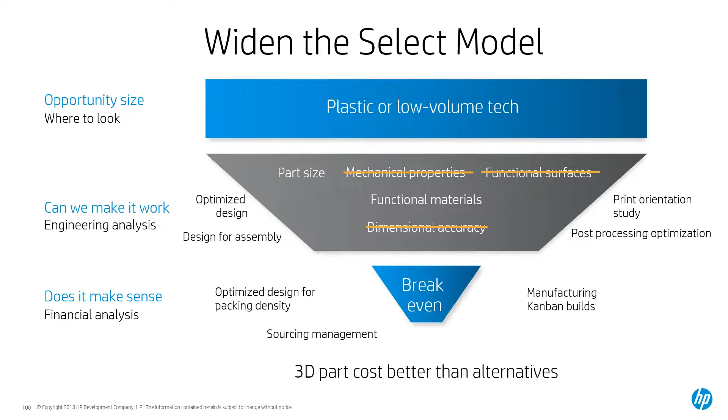So that's really how you can get that economic advantage. Now, how does this apply to your business? It can help you widen the part selection model, where things like mechanical properties and dimensional accuracy were important, they no longer are. It's now about optimizing your design for assembly, and that will help widen your funnel and find more opportunities within your business for a cost advantage as well as different advantages.

And that's how we at HP went from 29 parts to 140 parts within this particular example. Not only were they better designed, but economically they were all cheaper as well than using injection molding or traditional manufacturing processes. And that was the focus for the last bit and the end of my presentation. So thank you very much.